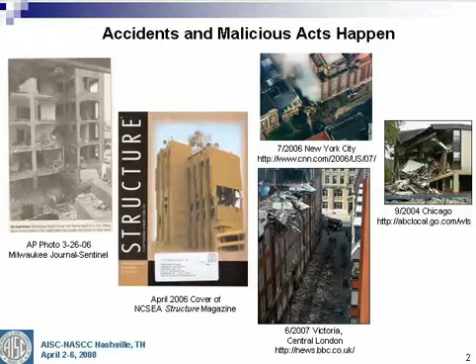Now, the objectives, at least for today, are unfortunately manyfold, but at the same time, fortunately, we can talk about a lot as well: number one, develop an attempt at defining what robustness means. It's not a term that's easily defined. It's very broad, very overarching in terms of a statement that it can make.

Now, we also like to look at quantifying the roles of flexural collapse mechanisms as well as geometric stiffness mechanisms in robust response and the characteristics of the structure. We'd also like to start illustrating some behavioral characteristics of multi-story systems so that we can begin to quantify whether or not a structure is robust. And we'd like to illustrate the role of one-way and two-way catenary membrane action that might exist in the floor slab system and the grillage of steel framing beneath there to help understand this, and then give a brief overview of some connection testing that we've done at MSOE and Marquette to get some idea of what's going on with simple connections in a catenary or slinging mode, if you will.

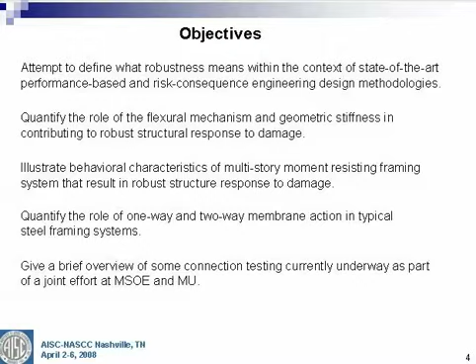And we'll begin our discussion by looking at how we might define robustness. That I thought was key to do first off, try to make a definition here. Now, there are a variety of definitions.

Unfortunately, going straight to the Merriam-Webster dictionary is what everybody on the street might think of when you talk about robustness. Beeby in 1999 is a UK researcher, with a lot of research in Europe going on currently, as well as here in the United States. Beeby began thinking about progressive and disproportionate collapse from a reliability basis many years ago now, over a decade, or nearly a decade I should say.

The GSA is naturally the General Services Administration, and there are definitions there as well. Now, all of these definitions leave a lot to our imagination. That's both good and bad. We as structural engineers need to quantify in order to design, and some of these definitions of robustness aren't totally quantified at this point in time. With more complex structural systems that we generate, understanding when a system is going to be robust becomes more difficult.

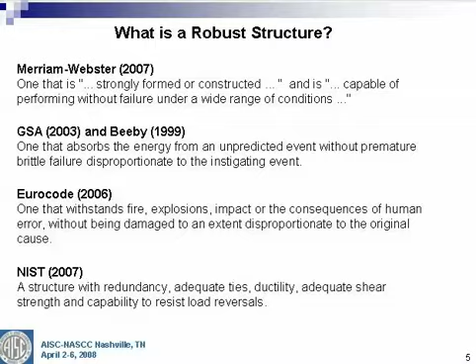Now, as I began thinking about trying to develop or entertain the notion of integrity provisions for steel structures, we need to ask some questions and pursue some answers to those questions. The first one is, what does the structural steel system get out of the box? You do nothing special - what does the system have in terms of robustness?

The next thing is, can these inherent transfer mechanisms be enhanced? Can they be quantified? There are horizontal and vertical ties orthogonally laid out in a steel building - that's how we build them in many cases. What are they good for? What can they do? We need to figure that out.

Ductility is likely the controlling limit state of all behavior. You have to have large deformations to get the belt flexural mechanism and the suspenders catenary or geometric stiffness. What do you have in terms of ductility demand? The last thing - what force demands might be present in the system after damage occurs?

A lot of focus is being placed on what causes the damage. I've tended to think about what happens after some damage happens, whatever it might be. The main benefit to answering all these questions is we may have the foundation now for ACI 318-like general structural integrity provisions for steel structures - something as simple as 3 bolts per connection minimum, 2 bolts per connection minimum, etc.

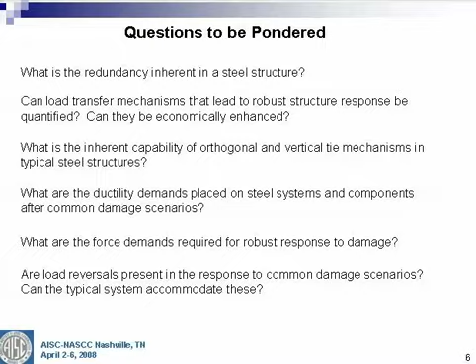Now, in terms of defining robustness, again trying to get at the heart of quantifying what robustness means, you can go through and look at performance-based engineering type definitions. The first definition here is really an extension of the NIST thinking. In this particular case, you may have a hazard, which might be an unintended loading, could be a malicious act, could be seismic loading, could be human error during design and construction. You have limit states, which classically might be a deformation limit state, interstory drift, could be connection plastic rotation demand.

You have damage, and in the FEMA world, with the earthquake engineering community, it might be something like none, slight, moderate, complete - just to begin to attach some meaning to these terms. Then you have scenarios of loss, and that naturally might be direct loss, could be injuries or death. It could also be indirect losses, like lost opportunity, lost rent, loss of function. All these can go into defining loss. Now unfortunately, there's a large range of possibilities for hazards, limit states, etc., and that needs to be defined, and can be difficult.

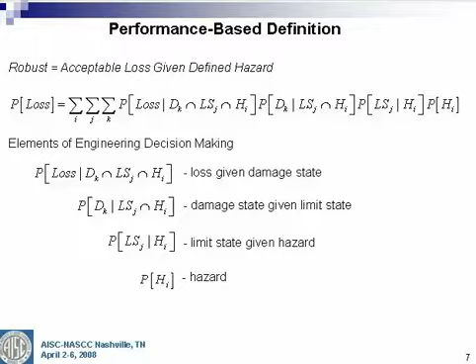Now, robust can also be defined as an acceptable probability of collapse. In this avenue, I tend to have a little more feeling for it, and that's why I selected another alternate definition of this. Again, you may have a scenario that could be malicious attack, or error during construction or design. The local damage scenarios - everything tends to condense a bit here and become streamlined. It could be damage to a column, it could be damage to a girder.

A lot of the provisions and procedures that we use now to assess the tendency for disproportionate collapse involve removing a column, damaging a beam, etc. Now you can begin to connect that to probabilities of collapse, which allows you to define an acceptable probability of collapse, which allows you to put a threshold on a robustness value. There's an awful lot behind the scenes that we can't talk about today, but somebody's going to have to begin filling these in, and that's important.

Last but not least, part of my life is spent developing optimal design algorithms for steel building systems. You can also look at expected costs, and you can begin optimizing a design for a level of robustness, and that's something that we might do in the future.

Now, the UK, Eurocode, European groups are beginning to look at risk consequence on this basis. And this process allows you to look at high risk, high consequence, low risk, low consequence scenarios and events.

Now, the problem with formulations of this nature, and it's a stab, it's discretionary at this point, but these parameters that you see along here help you define a risk factor. If your structure has a higher risk factor, you might need to investigate some more advanced design methods to make sure that you're going to satisfy that need to mitigate that risk.

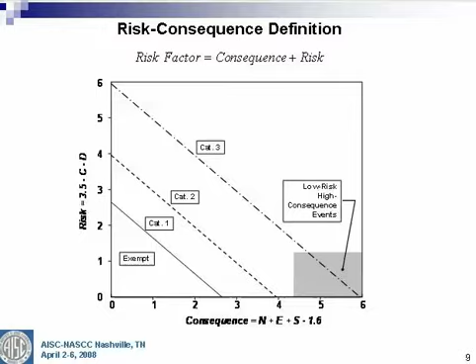Now, structures can be rendered robust without intervention if some risk factors can be established and decided upon. That leads us to the following pausing point, if you will, and we have an overall view on what robust might mean. We have three ways we can define it: an acceptable probability of loss, an acceptable probability of collapse, or an acceptable combination of risk and consequence. Those are still rather high-level terms and concepts, but at least it has an ability to put some numbers and have the rubber meet the road, as they say.

Now, robust structures, however, are redundant. That's interweaved throughout all of these concepts that you see. There's reliable levels of ductility that are needed, and we need to figure out what those are. And there needs to be an ability to accommodate load reversals during events. That's really how we're going to begin our discussion of characteristics of robust response, all within these frameworks of redundancy, ductility, and the ability to have load reversals accommodated.

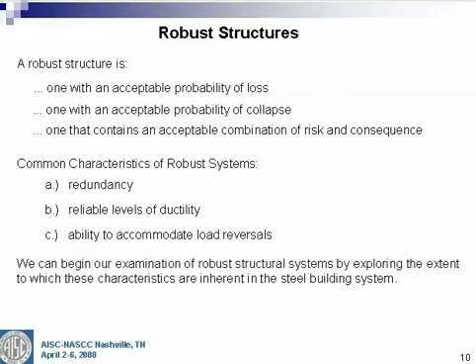Now, I'm not going to get highly equation-oriented here, but I at least wanted to point out some simpler ways where you can begin to quantify and characterize the robustness of a system.

But first and foremost, there are two primary mechanisms that are going to be activated in a structure that has some level of damage. The first is going to be a flexural mechanism, and the terms are broken up here according to the plastic moment capacity and span length. We lose an interior column. Again, people can argue all the time that this is the wrong damage model, but there are many damage models. We have an independent span system that becomes a continuous two-span system after some damaging event.

Some flexural mechanism occurs, some geometric stiffness mechanism occurs. Now, I'm not calling it catenary - catenary has the connotation of a parabolic distribution in shape. That's not necessarily what's going to happen in a steel structure, so we'll talk about geometric stiffness. That's the thing that's going to be activated as deformations increase.

Now, there's a huge assumption here that you can undergo plastic rotation demand at very large deformations. Now, the plastic design methods of the 70s were not really a second-order type formulation. They evolved into one, but the deformations here are quite large, and we need to have the rotational demand undertaken with rather large deformation and horizontal forces. So those big assumptions are there.

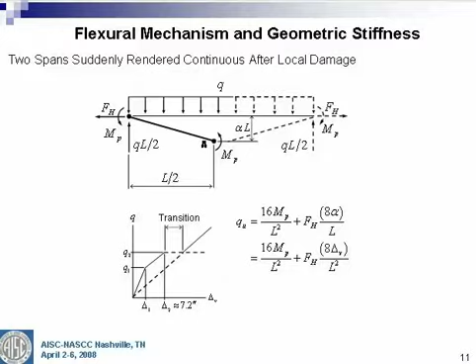Now, we can begin to look at partial end restraint on the connections. We, as steel engineers and designers, have a luxury - we can go through and tweak some of the connection stiffness parameters. We can tweak the connection strengths as we go along. And as we look at the partial end restraint, we can isolate moment capacity with a term beta and stiffness relative to the flexural rigidity of the spans that are generated. And as you look at this, we still have the same big assumption: can you undergo plastic rotation demand under large deformations with significant horizontal forces?

Now, when alpha theta, and that's really the stiffness parameter, begins to vary from 20 to 2.5, these essentially are fully restrained connections - these are flexible connections. As you look at these curves, all of them achieve essentially the same flexural limit state.

Okay, it's a plastic mechanism. The only difference among all the shapes is really how you set beta. In this case, we're taking it to be full strength, beta is 1.

As you begin to change the connection stiffness parameter, you begin to allow larger and larger deformation to take place in the system. You're still going to have the same flexural moment capacity, right? You haven't changed that. You're just changing the stiffness of the connection. One can argue those are intimately linked, and they certainly are, and we'll look at that case in a moment. But what you're doing is you're accumulating vertical deformation very rapidly.

Unfortunately, the structure is not smart enough to understand that it should omit its geometric stiffness. It's there. So what happens is, as this vertical deformation is occurring because the flexural mechanism is giving up the ghost, you've got geometric stiffness kicking in and generating large horizontal forces. So you can't have the free lunch, as they say. They both come together. It's a very important interaction as they go along here as well.

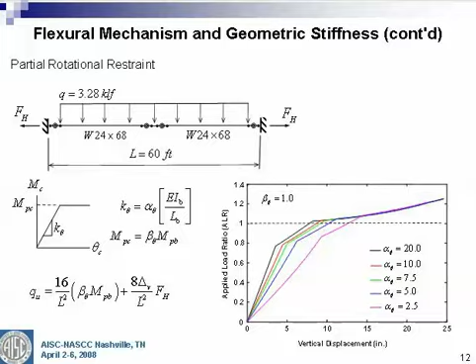Now, what level of these horizontal forces exist? They can be quite large. And in testing, you see quite large horizontal forces. But the systems are quite tough, too, and they're able to carry these forces.

Now, what you see here is the flexural connection stiffnesses are reduced. Again, these vertical deformations tend to increase quite rapidly. And what you see here in the vertical displacement is you get some indication of that. Now, these may be illustrative only in terms of their variation. But again, we're trying to look at the characteristics of the system, and we can take some liberties in how we value or vary these parameters.

Now, as you go through and have a flexural mechanism giving up the ghost quickly, you end up generating horizontal reactions in these systems very rapidly as well.

So what we can take away from some of these curves is that when partially restrained connections are being utilized, you are going to have a situation where you're going to activate geometric stiffness very early in the system's response to that damaging event. As a result, the geometric stiffness, if the forces can be carried, will be generated very rapidly. Now, what this means indirectly is that you might have a higher tendency for tensile rupture at the connections if those forces can't be accommodated along with these other demands that are being placed on the system and on the components.

Now, we can begin to relax some of our connection scenarios a little further. Some might have noticed that previous slide and said, what connections at the end of a two-span system are infinitely stiff in axial behavior? Well, the answer is none. So now we start to manipulate that term.

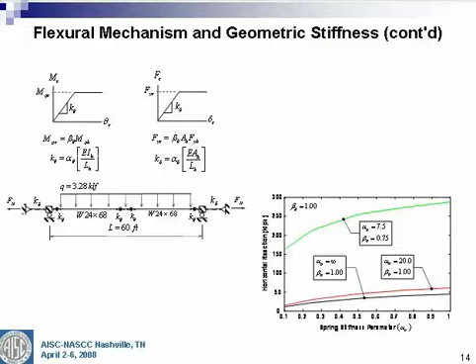Now, what happens when you get more than one beam? Right? We have stories. There are philosophies that suggest you should harden a floor level and carry everything up above. I'm of the opinion you might want to let the structure react to the damage as it wants to, unless it can't. So let it figure out what it needs to do first, and then if you need to help it, help it.

Now, you still get geometric stiffness effects kicking in. These are huge horizontal forces, but don't let them scare you. Okay, tests show that some of these forces can be carried. We wouldn't believe it, but again, the structure tells us a lot of what we don't know. So we want to make sure that we can address that later on.

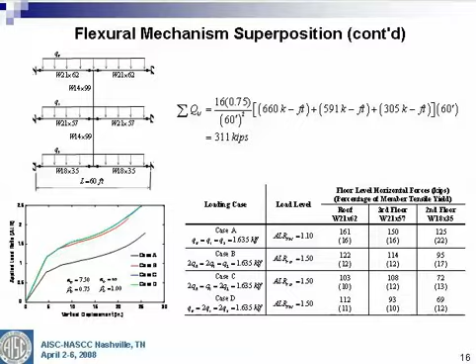Now, what happens when you have a building and not these isolated walls within the structural system? How do you begin to simulate the response of the system now, which involves more than one beam, two beams, three columns, etc.? Now, here's a scenario where we looked at a three-story building, modified slightly from the research that SAC had done, and we looked at three-dimensional transient inelastic response of the system with infill beams that were pinned and with perimeter moment-resisting frames.

Now, the first thing people should jump on in this slide is, why didn't you pull the corner column? Well, yes, very important. I won't argue. The interior column locations at the perimeter moment-resisting frame is what we're focused on right now. Future work is going to have to start looking at those scenarios. Now, I would counter on the corner column: if you're going to study removal of that corner column, you best not be forgetting about the orthogonal framing contributing to that response. Okay? So no two-dimensional analysis. You're being far too conservative in what you're doing.

Now, the floor diaphragm stiffness was modeled here using weightless X-bracing members. So we would like to see what a floor diaphragm might do to alleviating or perhaps enhancing the tensile forces that are generated in the connections in that moment-resisting frame. And that's an important aspect, I think, to the structural analysis.

There was a simplified interaction of axial load and moment, mainly as a result of some software limitations. And then the local damage scenario that you see involves removing one of these columns down below. And we'll focus on one of those now. Now, as we walk through the analysis, how was this done?

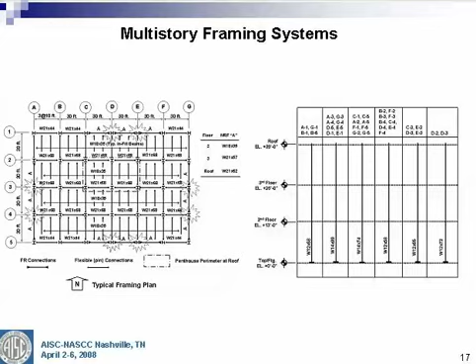Well, we wanted to look at the transient response. So as we loaded this structural system, essentially we put gravity loading on, and I can explain what the magnitudes of the loads were. And then at the same time we applied the gravity loads, we applied the column loading to resist it. So we grew that column loading with a time history function, and then after we let the system stabilize with its inherent damping, we turned it off. And we watched what happened within the system.

And the system now responds at all three levels in some unique ways. And what those diaphragms also allow you to do is they allow you to explore what's happening throughout the floor plate as the system responds to that damaging event. So what you see in the X-bracing members, admittedly a simplistic model, but you begin to see how the diaphragm itself has both compression struts and tension diagonals or principal tension diagonals throughout that floor plate system, and they're all helping and working to resist the loading.

And that's what we wanted to try to do, is figure out how that might happen and how we might begin to quantify that. Now, it also suggests, and the analysis suggests, that these horizontal deck systems, if you will, or in-plane shear stiffnesses, should be considered as potential tying forces. Right? They're there, and if we can quantify what their contribution is, we might be able to alleviate some of what we're expecting these horizontal members to carry. And that's an important thing.

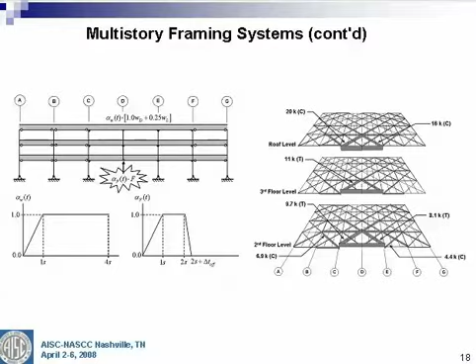Now, as you begin to look at the individual components within the system, you begin to look at scenarios where strong column, weak beam behavior, that's another characteristic that appears favorable, and people have known this for some time, but you end up getting a capping of the bending moment demand that's being funneled into a column. And that we've known to be important in seismic analysis, and it certainly is important here, and we might have expected that. It's a good thing to have happen.

And if you look at the results, the inelastic response will likely need to be used to assess the system's strength and characteristics. So elastic analysis isn't going to fly here. So if you're not comfortable doing inelastic analysis and comfortable understanding how a software package is operating in an inelastic analysis sense, then unfortunately you may have to get comfortable quickly because it's going to be needed.

Now, column 268 or beam 268 gives us some indication of what's happening. From a design point of view, you'll have a full plastic moment generation under gravity loading, and you will get a full reversal of moment. Okay? So that full rotational demand at the plastic moment level is going to have to occur along with some significant tension forces.

Now, how do you develop a protocol like the FEMA group did for earthquakes? They studied many ground motions, they looked at the demands on connections, they developed protocols for loadings that had energy dissipation characteristics, etc. We now can do something similar to that here if we understand the response. So now we'll have some gauge on how we could do connection tests to demonstrate that things are going to move forward correctly.

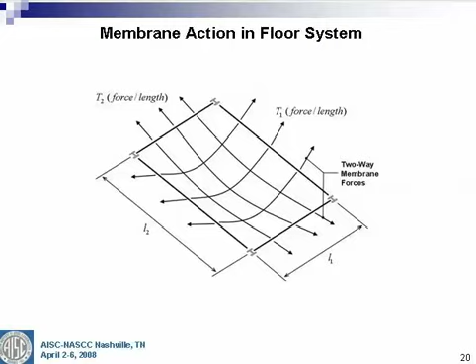Now, a typical infill beam being lost, maybe it gets hit with a forklift, maybe it's a hit from any other kind of vehicle, who knows what it might be. Could be fire, right? Fire has been studying the membrane capacity and tensile capacity for quite some time. We don't take advantage of it in integrity, but it's there, and it's important. So if you lose the infill beam, this is very favorable because your steel deck is spanning in that direction. So you've got some tension reinforcement in the deck, provided you can anchor it, and you've got some membrane reinforcement in the form of welded wire mesh present as well. So those two things are going to begin to help you carry loading.

Now, the studies that we had done looked at carrying a sustained loading, a point-in-time sustained loading of about 100 pounds per square foot on this slab. That's fairly good. There's no dynamic multiplication that can be carried, and the General Services Administration has some factors that are being discussed and being manipulated, but those factors essentially account for the dynamic change in the response of the system, and that essentially was omitted here and really couldn't be carried. But sustained loading likely could have.

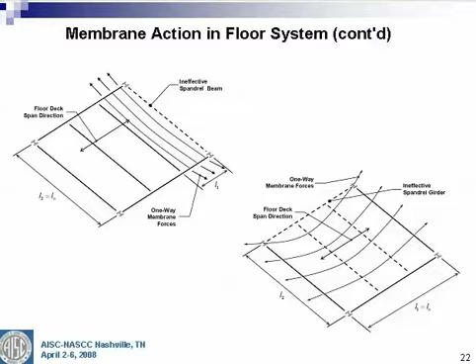Now, if that's happening in the system during response to damage, you are going to drag the membrane concrete floor system down along with the steel grillage together. And dragging them down together makes compatible deformations happen, and as a result, superposition of the strengths could occur. Now, I'm not guaranteeing you're going to model the response exactly, but strength, you're going to do a reasonable job with that. So with those 3 systems, we can look at response.

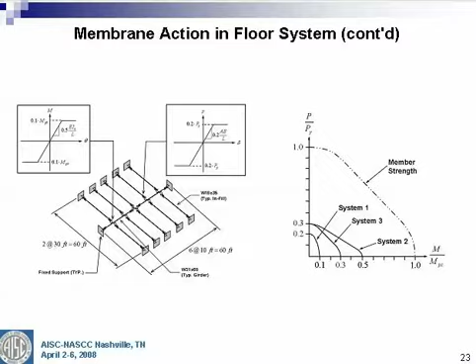In this particular case, we have a strength of the system that has moment strength that is higher than System 1 and axial strength that's a little higher. As we move forward here, the analysis is telling us there's a singularity. Okay, we have an instability. It's the analysis. The real system's not going to tell us that same thing.

So what happens after the fact, we wanted to figure out how to relate that back to another system, and that's what we did here with System 2. We kept the moment capacity a little bit less than System 2, and we kept the axial strength in the connections the same. As you do that, you get a little bit more controlled variation between the flexural mechanism and the catenary tension. More importantly, there's a controlled transition there, and we don't know what might be happening here.

My gut tells me it's going to jump across over to here. I don't know how rapidly that'll occur, and I don't know what damage that might incur.

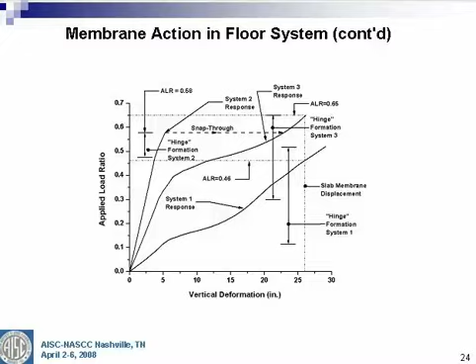Now, what we've done at MSOE with a colleague in the audience, Chris Raebel here, and some of his graduate students, is we did some connection tests, and we did 27 of them: 3, 4, 5-bolt simple connections. We did shear tabs, single connection angles, and WTs.

Now, as you look at the response of these, there's 17 inches of deformation on a 14-foot span, and nothing's fractured yet. If you look at what's going on in the angles, you're flattening them, and you're actually pulling the angles off the bolt heads. You've got some limit states going on here, and these were just simple shear design connections, if you will.

So that process is ongoing, and Adam Friedman, Scott Thompson, and Matt Johnson are doing some excellent work, and we're trying to figure out what's going on right now, looking at the data and the strain readings.

Now, in summary, a steel system is inherently robust. We have to figure out how to let it tell us what it already knows, and we need to start digging at that information. Performance-based engineering might be a way for us to define a robust system, and it might also be a path for us defining a measurable level of integrity provisions, so that we can have some targeted provisions for that kind of activity.

The flexural mechanism superposition is a good way to go about assessing the characteristics of a robust system. And the in-plane stiffness of the floor system is important, and it likely plays a role in tying the system together. It'd be nice to understand that. Also, the membrane and catenary capacity of the system might be better off as a smooth transition from flexural to catenary. That's something we might need to look at more frequently and in more detail.

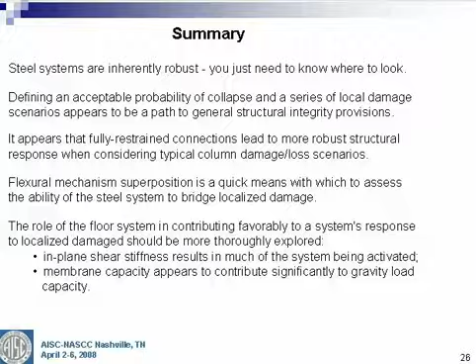Strong column, weak beam behavior is likely a good thing, and we knew that for quite some time. A robust system will also have connections capable of undergoing full reversal of moment with axial loading. That's something we need to begin to study and understand a little bit better. 3D framing systems are another very important thing, and we need to understand this transition from flexural to catenary behavior.

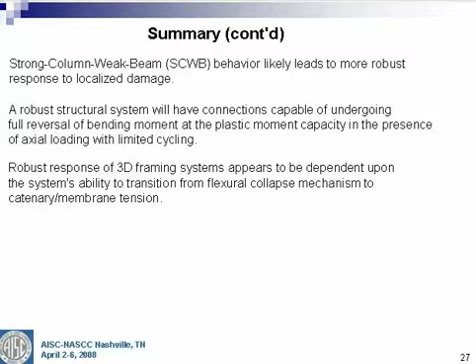In conclusion, I'd like to thank the AISC for some money to begin thinking about these things. Unfortunately, as you think about a project like this, you raise a million questions more than answers.

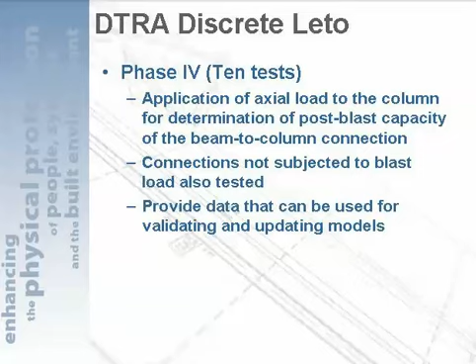So the Phase 4 test looked at some specimens that were blast loaded, and others that were pristine, which would better replicate the immaculate removal approach. This is the series of tests, and this gives you an idea for Phase 3 and Phase 4 what tests were performed. I'm a blast guy,

not a steel detailer or designer, so this is the terminology that DTRA used in the test. Seismic moment connection is essentially the welded flange connection, bolted. Wind moment is essentially just a bolted cover plate connection. Then they evaluated bolted shear tab connections and bolted split-T connections.

Most of these were tested in Phase 3, meaning there was an explosive event that loaded the column up and caused deformation in the system — rotation of the column, rotation of the beams. But some of them were just Phase 4 tests, where the same system was built, the column was just cut off, and then the ram force was used to push down.

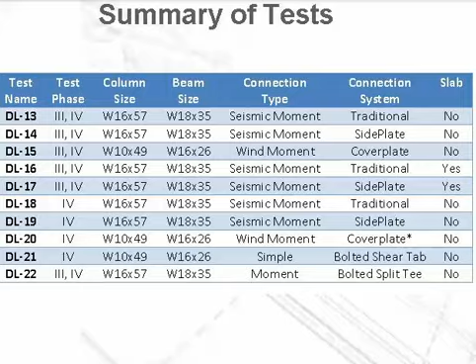Well, this is — let's see, Chris, did you leave your... Oh, okay, thank you.

This is the structural setup that was used, and essentially there's a column bay right here in the center. This is the double span beam that we're testing, and these are the connections of interest, adjacent to the column. So there's very stiff and significant anchorage on the end here representing a lot of bays of structure on the other side of this damaged bay, providing the axial capacity in this member. So this is held on to pretty well.

In the Phase 3 tests, this was all covered with cladding, and there was a charge out in front of the structure, out here somewhere. This was all covered with cladding, with a column in the middle here. The blast goes off, the blast load loads all this up, destroys the cladding, but in the process loads up this column, generating the damage in the column and potentially the damage up here in the connection area.

This gives you a top view of the measurement system. There was a ram pushing down on top of this area where the connections are, where the column was before it was either blast damaged or removed. Strain gauges in the beams, load pins out at the support, so we can measure that axial force as it's generated.

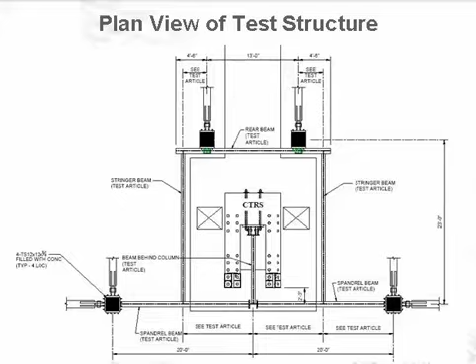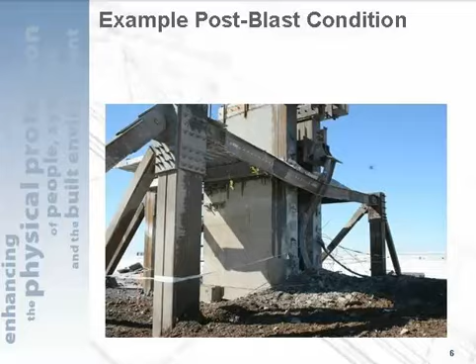What we were asked to do was review the data for tests of a number of these connections, to come up with a scheme to compare them in terms of rotational capacity, flexural capacity, and then energy absorption from a flexural standpoint and an axial standpoint.

Chris talked about that transition from flexural to axial, and that's a real important point we tried to get a handle on. We were tasked with figuring out how to implement these results into the existing GSA DoD criteria, which is essentially swiped from the FEMA 356, now ASCE 41 approach, where it's essentially a flexure-based approach giving you allowable rotations to work with depending on your connection type within ASCE 41. So the updated GSA DoD criteria will refer, even more so than in the past, back to ASCE 41 and how you do your analysis.

So the thinking here was, as much as we could use this data to refine that approach, that would be our ultimate goal, knowing that there was also this axial stiffness, geometric stiffness if you will, that Chris referred to, that comes into play. That's what we were tasked to do.

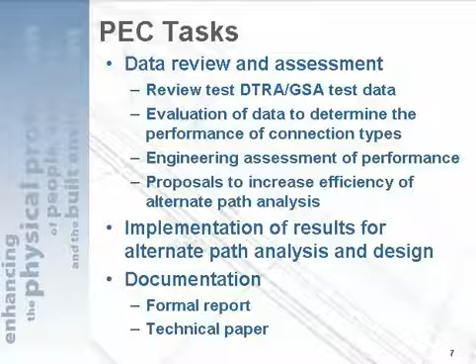The measurement scheme or evaluation scheme we came up with was to look at ductility of the different kinds of connections and compare them in terms of rotation. Then we came up with a scheme for comparing them on an absorbed energy basis, which I think is a neat way to look at one connection with respect to the other.

One of the parameters that Chris mentioned that you need to consider in an alternate path analysis, or this sort of flexural analysis with highly inelastic behavior of these connections, is this dynamic increase factor. He alluded to that as sort of the inertial resistance that the system offers, and the dynamic increase associated with the fact that this is not a static loading; it's a dynamic loading.

We've looked at that in the process of developing the updated DoD GSA guidelines. In the existing guidelines out there, it makes you double the load. It says, well, it's a dynamic system, so worst case would be if it stayed elastic and you multiply your load by 2. Clearly, if we're going to allow significant inelastic behavior of these connections, 2 is very conservative.

So we've gone through the process now in the new UFC. As a function of the inelasticity that your connection allows, you'll be able to back out what multiplier you have to put on load. Generally speaking, you're not going to have to increase your load more than 20% in any case. So we're dropping down now from a factor of 2 to a factor of 1.2, which is very significant.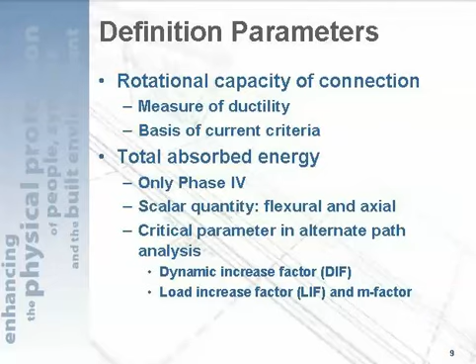We did that based on a number of analyses of three-dimensional structural systems, including different levels of inelastic behavior. But generally speaking, you're never going to have to increase your load more than about 20% over the actual load. So that's an interesting conclusion there.

Axial energy we looked at as a percentage of total, again comparing that geometric related energy to flexural. And then finally, one of the things we looked at after we noticed some differences in the data with what you would get if you used the ASCE 41 modeling procedures, and Chris again alluded to this, is the stiffness that's actually present in these connections, which generally, based on this data, is less than what you would assume creating that modeling curve based on ASCE 41.

We compared the results to the life safety limits, and again, this is sort of the inelastic behavior limits that you're allowed to use in ASCE 41. There's life safety and collapse prevention, and these are the definitions of those, seismic-based. Generally speaking, the UFC and GSA guidance leans towards allowing this collapse prevention value. We're talking about extraordinary loads here. And then we compared the stiffness, as I mentioned, from ASCE 41.

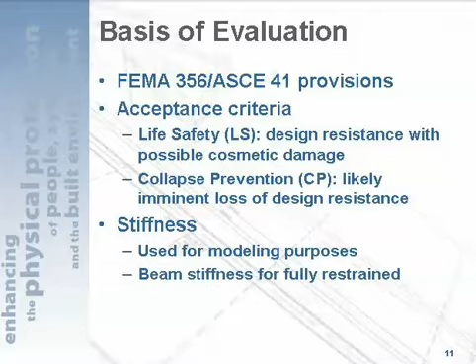All right, let me go through some examples of the performance of these connections. Basically, what we were able to generate from each of these tests: remember we had strain gauges, we had load pins, and then we had the ram force, and then we had a measurement of deflection for each of those connections. So there's several things you can generate here.

The first, in the upper left, you can simply plot as a function of chord rotation, that's another way of expressing deflection, the force, the ram force that you're applying to the system to generate the displacement. You can compare that with the axial force that you would measure directly from the load pins or that you would infer from the strain gauges. So we plotted that for each of the tests.

There's some difference in what you get out of the strain gauges and what you get out of the load pins. Generally, we believe the load pins in all of the tests. But what was reassuring was the strain gauges were at least giving us about the same shape there as things came apart. As I run through these, I'll show this every time because this is the one that's sort of the mechanism of how things pop and break. We've plotted that on there.

In the upper right, based on a little sum of forces calculation, you can actually plot what we call a shear force, or a force related to flexure in the system. You can plot an axial force and a total force. If you add the axial force together and the shear force together, you should get the total force. You can compare that to the ram force, and lo and behold, there's actually two plots laid right on top of one another there, and you do get that number. Once you know the shear force, then you can actually calculate a moment, since you know the distance from the pin over to the deflection point where you got the ram force.

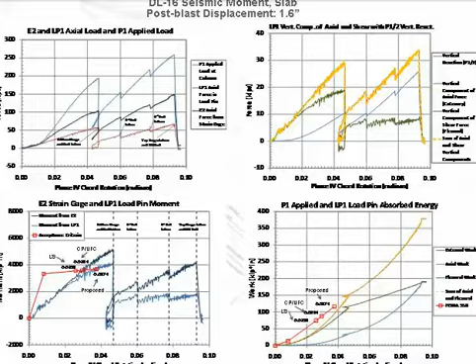And so for each of these connections, I've kind of plotted at least 3 of those in some detail. And for example, that first one we looked at, this is the seismic moment. And I might mention that some of these tests had a slab in place, some didn't. This happens to be a blast tested one, and we'll look at connections that were not blast tested. So this is slab present, blast tested.

And so you can kind of march through here and see where the different events took place that gradually degrade the performance. So we've got bottom flange and bolt failure there, second bolt failure there, third bolt failure, and then top flange failure. So you can kind of see how the events take place in the degradation of this connection.

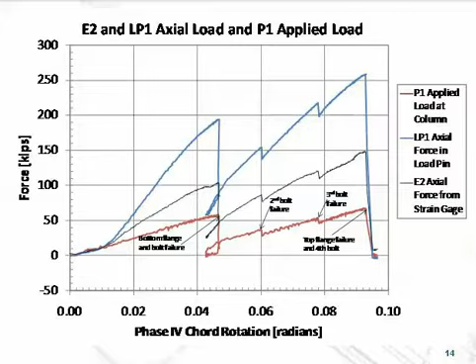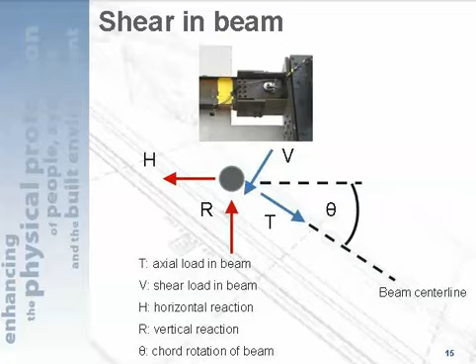I talked about calculating that shear value, which allows us to essentially evaluate the moment versus deformation and that flexural energy, and that's simply based on, as this angle changes as I displace this, then the sum of forces suggested that more of the force goes into axial response than was in the shear response. So that's all that was done there. And this is that plot that was in the upper right-hand corner that kind of shows you flexural force, axial force, and then the sum of the two for that particular connection.

Having that shear value, you can calculate the moment versus rotation, and of course the squiggly lines are always the actual. The red lines in these plots are if you use the stiffness from the guidance in ASCE 41, this is the kind of modeling curve that you could develop. Well, as you can notice, there's a significant difference there.

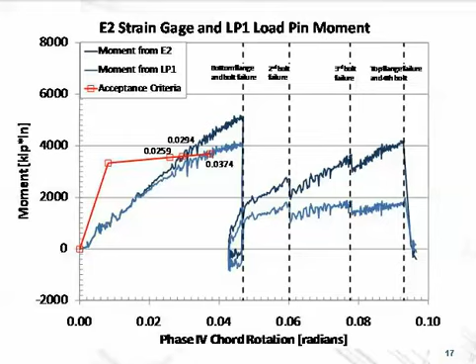If I pick this point as my allowable, the area under this guy for the actual is a good bit less than the area under that whole thing. So that stiffness is a big thing that we're thinking that we might need to take account of in future guidance.

Change in length, simply a geometric calculation. And then finally, as I said, if you consider that change in length, you can compare then the flexural energy there, or work, and the axial work, add those two together, and you get the total work that's being done by the ram over the displaced element.

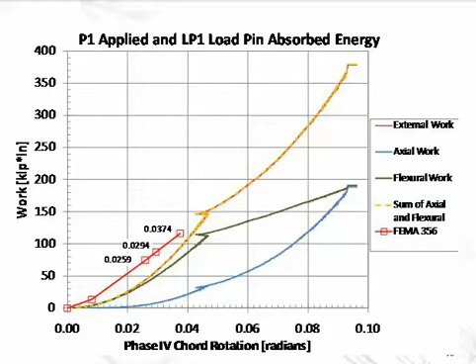And then you can kind of compare the life safety value, the collapse prevention value, and sort of our proposed value, 80% of loss of flexural capacity. And again, these are significant rotations. That's something to keep in mind here. So that was for essentially the WUF connection, blast loaded with a slab.

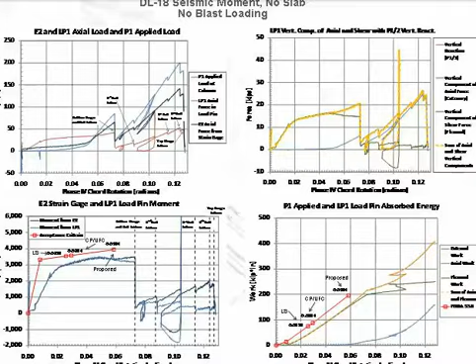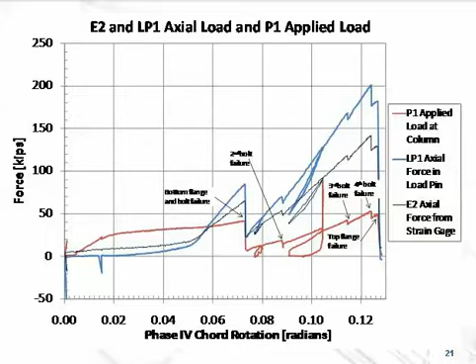This is no slab, no blast loading, same connection. I'll just kind of pop through these a little bit. This would be the sort of sequence of events, and not very much different, really. Bottom flange first bolt, second, third bolt, and top flange failure. Thing that's interesting, though, is in a non-blast loaded case, if you plot this moment versus rotation, we're doing a lot better as compared with the modeled value.

So clearly, blast affected the performance of that WUF connection in terms of the available energy, if you will. And if you compared this to the previous plot, that's essentially what you would see. So here's a comparison. Good bit of flexural energy that tapers off down here at the values we're proposing. Small amount of axial energy that then takes off at larger rotation. So this says that for non-blast loaded cases the guidance that's in ASCE 41 and hence the UFC is pretty okay.

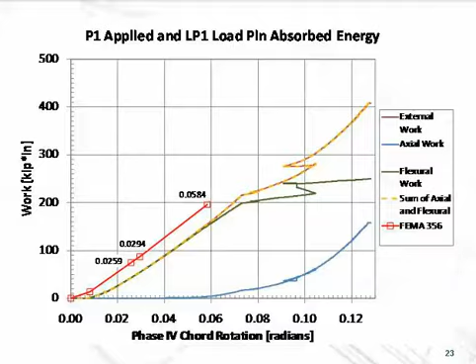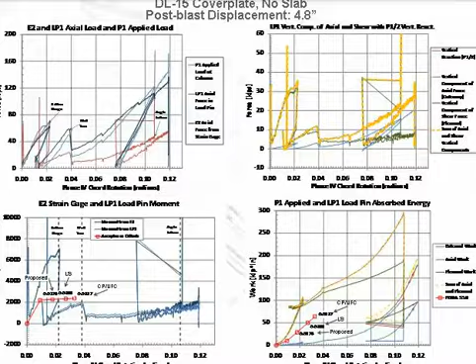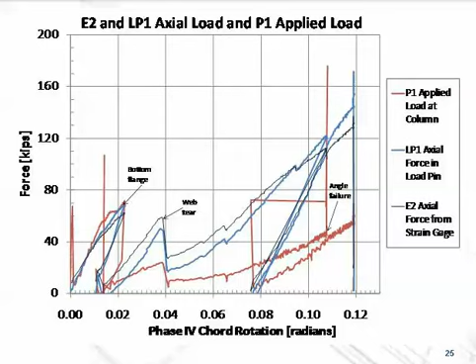So marching through these, just to compare, this is the cover plate connection, no slab, blast loaded, sequence of events here, bottom flange failure, web tear, angle failure out here to basically 12%, significant rotations. This connection behaved really strangely in these tests. This is the blast loaded case. So here's your predicted, your modeled flexural moment versus rotation. This is the tested value. So significant difference there.

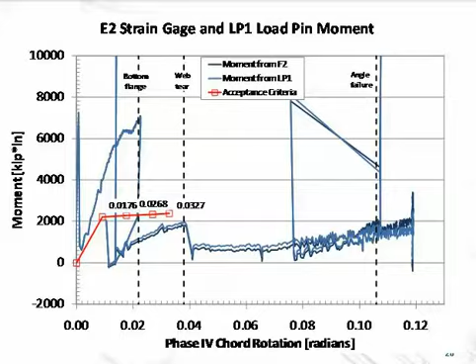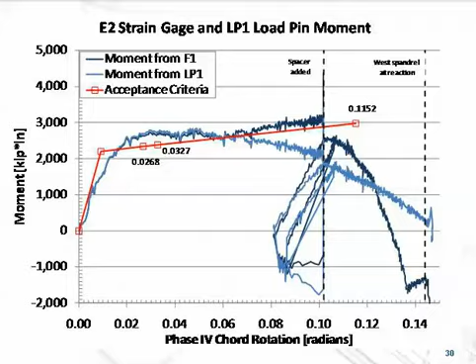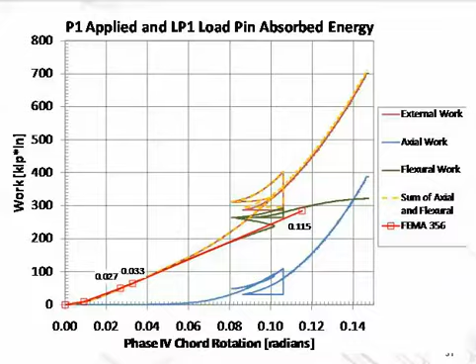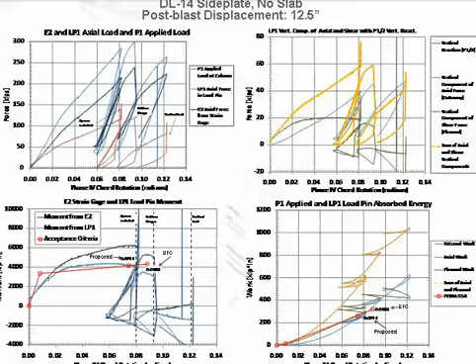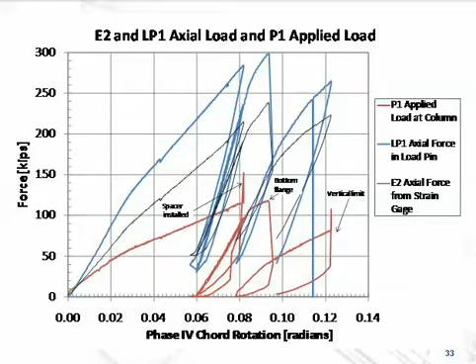Side plate, Jesse and David can talk about this a lot more and better than I can, but same sort of approach was used, comparing. The interesting thing with the side plate is because of the significant rotations you can get, had to stop and install a spacer so you continue to push on the thing and get as much rotation as you wanted out of it. But the modeling curve that one would expect and the nice performance of that connection. The values out here, and there was a little bit of difference between the proposed collapse prevention value and sort of 80% of what was the apparent flexural response. So that's one thing we noted in the report and in the study.

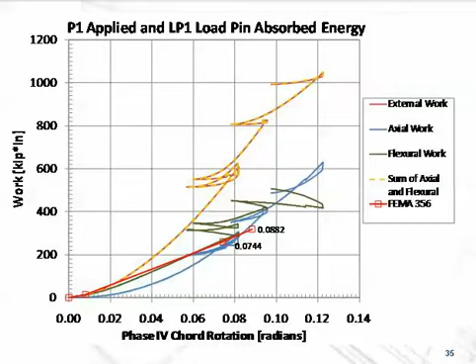And then again, this is a plot of the energy. And what's interesting, if you remember the cover plate connection, out here at the range where we've got the suggested performance values, there's a significant portion of the available energy that's contributed axially for this type of connection as compared with, say, the cover plate and some of the other ones. So this is something to think about in terms of the total. Here you've got almost 50% of the energy related to that geometric response. So if you're doing that modeling, you may want to consider that.

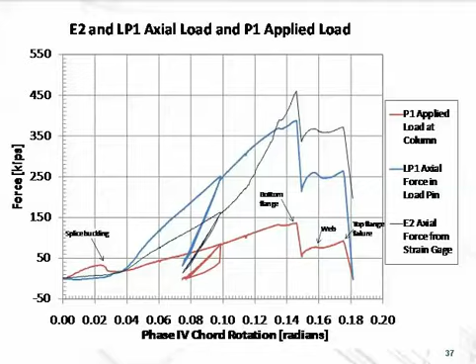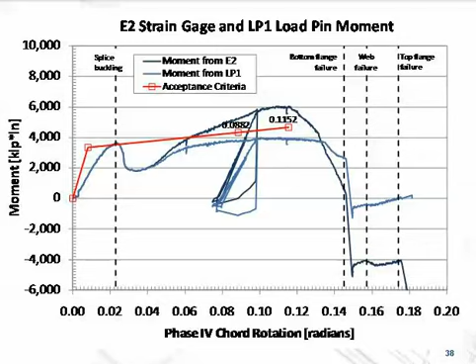Side plate, no blast loading. A little bit of an interesting response there. There was a little bit of buckling going on here at some point, but the connection did recover. So with respect to the modeling curve, maybe this area equals that area, and you're fine. But that was sort of an interesting observed response there. And there's a picture of the buckling that occurred.

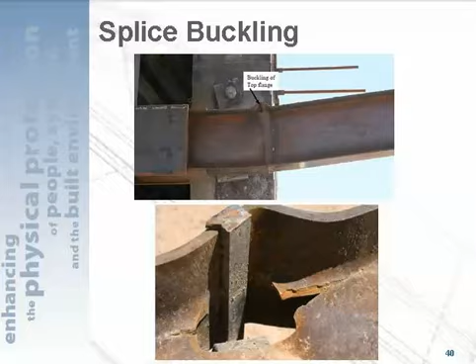Well, when you compare all these, what is it that you can discern? Well, you can compare them based on total absorbed energy. You can compare them based on percentage of axial energy. You can look at these from a stiffness perspective to decide what it is we should improve. And then you can evaluate the sensitivity of these to blast loading or without blast loading.

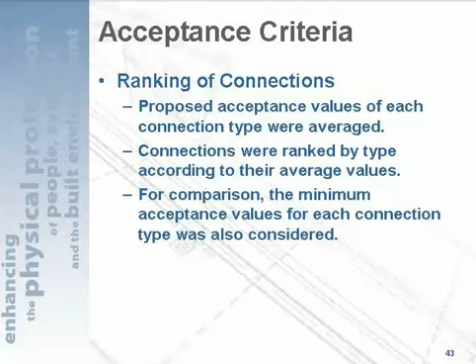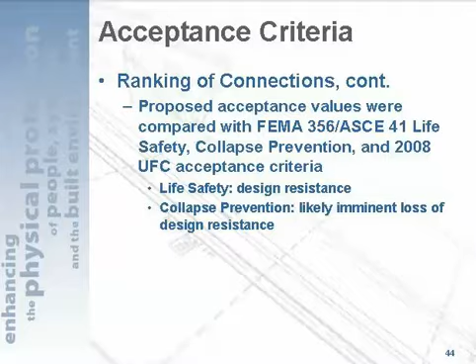Instead of ranking of connections, this should probably say performance comparisons of connections. And so basically what was done was we looked at the FEMA 356 / ASCE 41 values for collapse prevention, and then what will likely be proposed in the 2008 Unified Facilities Criteria. And so we do that for rotation, for ductility alone, for energy, and for percentage of axial energy.

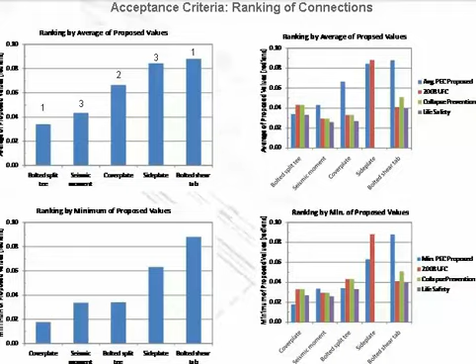You may have a lot of shear tab connections in your structure for gravity beams or whatever else, and so this is not an insignificant conclusion. You may have a lot of energy there that you can count on available to help you out.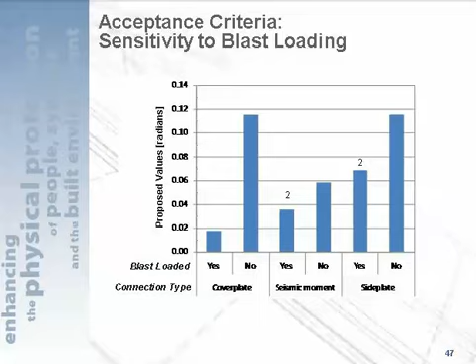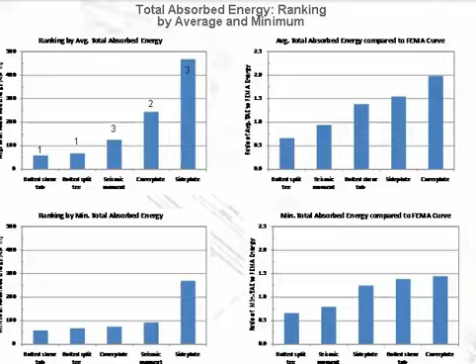Absorbed energy, total absorbed energy, you can rank those again comparing to ASCE 41 / FEMA 356. So again, bolted shear tab on the left, and I should mention these are average values and minimum values. Obviously side plate's the big winner here. Cover plate connection, seismic moment, bolted shear tab. So that's a comparison based on the total energy.

Sensitivity to blast loading. You can compare each of these with blast loading, without blast loading. Not a whole lot of difference in the seismic moment. Some difference in side plate, significant difference in the cover plate.

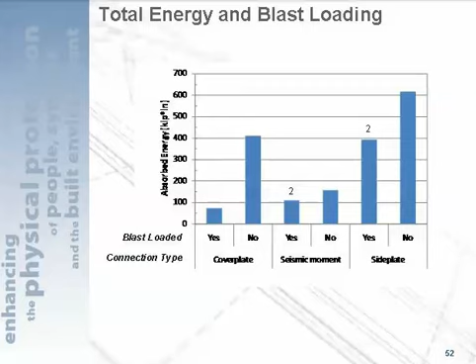And then axial absorbed energy is important just from an analysis standpoint. Are we going to allow guys to continue to do this just flexurally based approach? And so you can compare, again, the percentage of energy, and as you would expect, side plate's pretty high over here, but the bolted split T is also. So that's something to consider when we develop further analysis guidelines, that it's significant out at the ranges we're proposing for the acceptable performance criteria. That guy has a significant portion of its capacity due to the geometric stiffness.

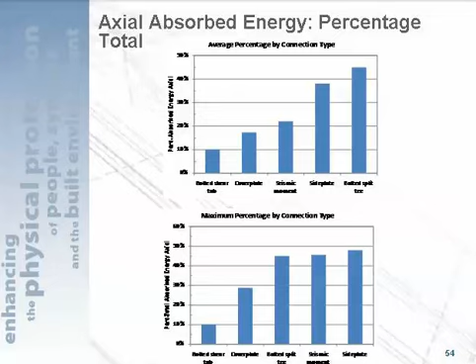Sensitivity to blast loading, the cover plate connection, this is the one that's kind of flipped around for cover plate. So you can compare both of these in terms of blast loaded or non-blast loaded in terms of axial energy. This is the oddball of the bunch here.

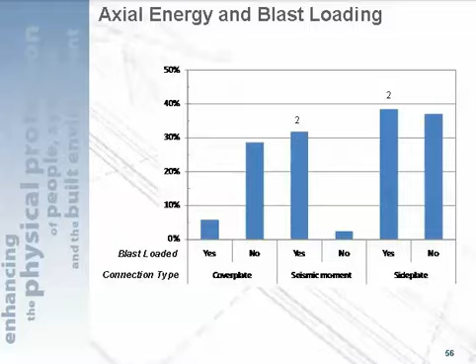Connection stiffness. We tried to evaluate that from each of the tests and compare that to the modeling stiffness. And you can plot the percentage of the design stiffness for each of the connections. Around 100% for the fully restrained would be an ideal value. So when these values are a little bit lower, we need to think about how we're recommending modeling stiffness if we're just using flexure as an analysis approach.

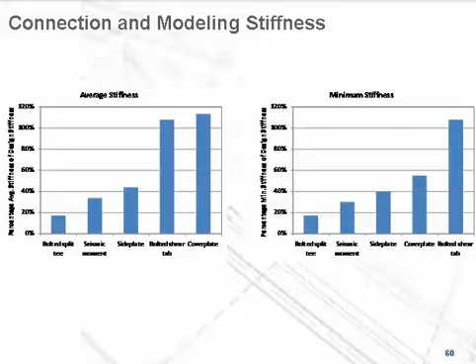So finally, what can we do with all this? Well, we think we can use it to validate ASCE 41 criteria for the collapse prevention values that we'd like to use. Maybe in the future bump some of those values up a little bit. It gives us a little bit of confidence that the flexural approach that we're using is reasonable. We've got a significant amount of capacity beyond the flexural mechanism in these connections. That's kind of our safety factor.

There's some conclusions here that are arguable, and Jesse and David would probably argue about, but there were some things we saw in the test for all of the connections, particularly the cover plate, the unpredictability of that. It gives us pause as to what we recommend the performance criteria to be.

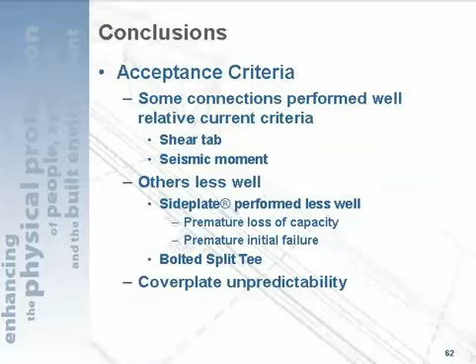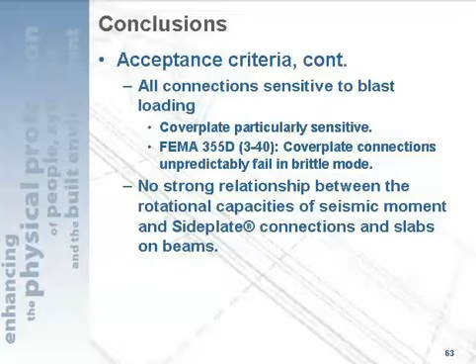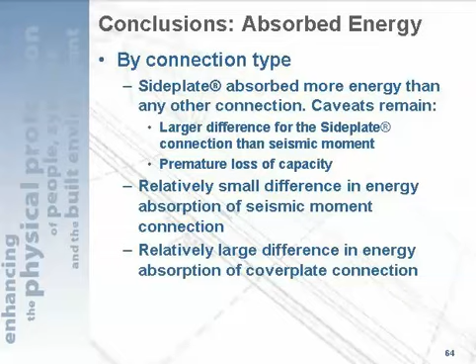No strong correlation. There's a limited number of tests, but as far as with and without slabs on beams, whether or not that should be a big contributor. Energy absorption: small difference for the seismic moment connection, large difference for the cover plate, as we saw. Sensitivity to blast loading, it was really there in all cases, and that's something for us to think about.

It may be that in future recommendations for the analysis we say, if you're evaluating the connection that's right there where the blast occurred, you should probably degrade the allowable performance of those connections. At floors above there, you may be able to use the ASCE 41 collapse prevention values. So that's kind of the thinking that we're going towards there.

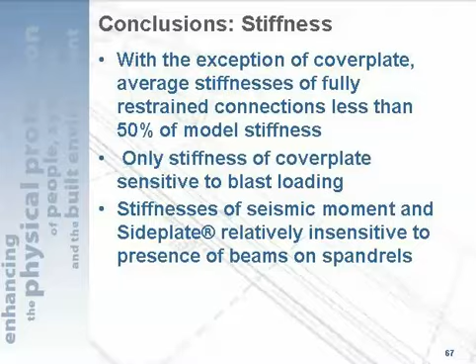Stiffness, I think, is a significant conclusion from these tests, that we probably need to adjust the modeling stiffness that's allowed if we're going to stick with the ASCE 41 approach. So we can use the data. We can consider the blast-loaded cases probably worst-case scenario. The overall case was worst case because these were exterior columns, and it was an overall sort of vehicle bomb type blast loading.

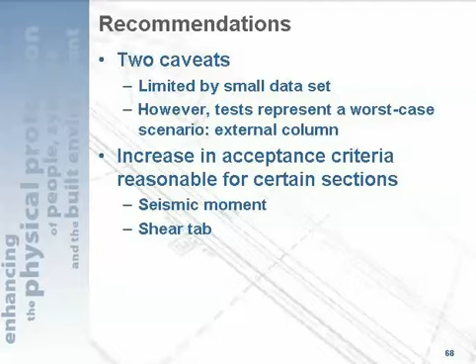Satchel charge, you'd have shearing or base plate failure, but probably not near the damage up at the top of the column in terms of the interface between the beams and the column. So we may adjust the performance criteria based on damage and decrease the FEMA modeling stiffness. And that's it.

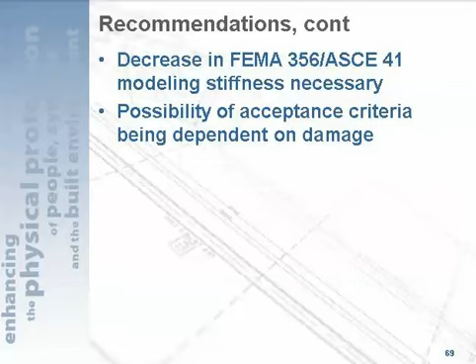Did you test any dog bones? No, I don't think we did. There was talk at some point. There was a large scope that was slated to be tested, but of course funding always seems to lag behind. And I don't think it's completely off the table. The test structure is still there, and so if somebody comes up with some money, maybe there will be. But the question was, were there other types of connections, specifically dog bone, investigated, and not at this point.

Yes, sir. What David said was that I only presented our review of the experimental results in terms of comparing these to ASCE 41 approaches. There was a significant amount of other work done. David and his firm did some significant analysis that also included some of these other connection types.

There was also a numerical modeling part of this study, modeling the blast all the way forward through the response of these connections dynamically. And if you want to go ahead and start a run on a multiprocessor machine and wait about 14 days, those work. But we could actually do the test quicker than those numerical analyses.